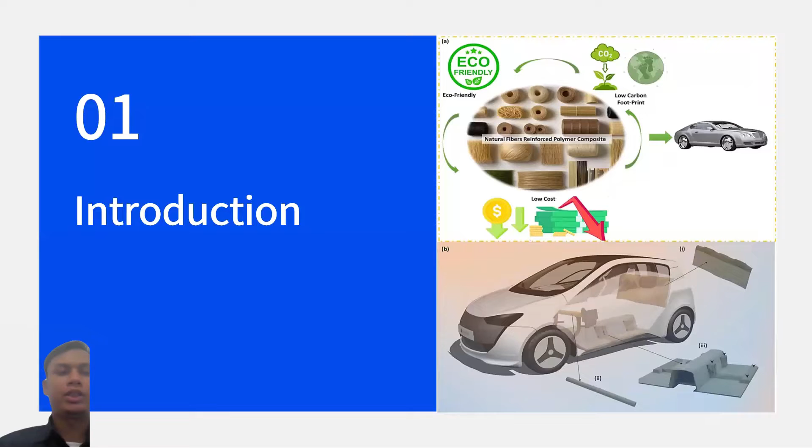The first one is introduction. First, importance of coir and jute fibers. In recent years, natural fibers such as coir and jute have gained great attention because they are biodegradable, low cost, and environmentally friendly. They help reduce environmental impact and promote sustainable resource utilization, especially in the automotive industry where lightweight and green materials are essential.

Secondly, thermal insulation significance. Thermal insulation is crucial in controlling heat gain and loss inside vehicles. Natural fiber with good thermal properties can enhance passenger comfort and reduce energy consumption.

Physical and economic advantage. Coir and jute fibers possess advantageous traits such as biodegradability, low density, good physical and thermal characteristics, affordability and processability, making them appealing for cost-effective and eco-friendly composite material.

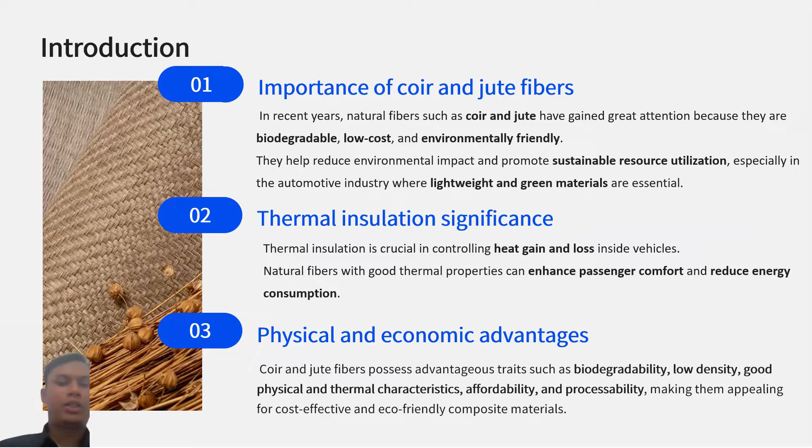The experimental methods. First, we have the extraction of coir fibers from husk of coconut, offering high abrasion resistance due to their lignin content, approximately 45%. Brown coir, thicker and stronger, is extracted from fully ripened coconut for use in matting, brush, and composite production.

In the extraction of jute fibers, they are derived from Corchorus species, characterized by uniform overlapping cells, known for their biodegradability and thermal properties. They are utilized in various composite applications.

The physical and chemical properties. Coir contains cellulose, lignin, pectin, and water, while jute exhibits uniformity in diameter, elongation, and fiber strength. Their distinct properties make them suitable for fabricating hybrid composites.

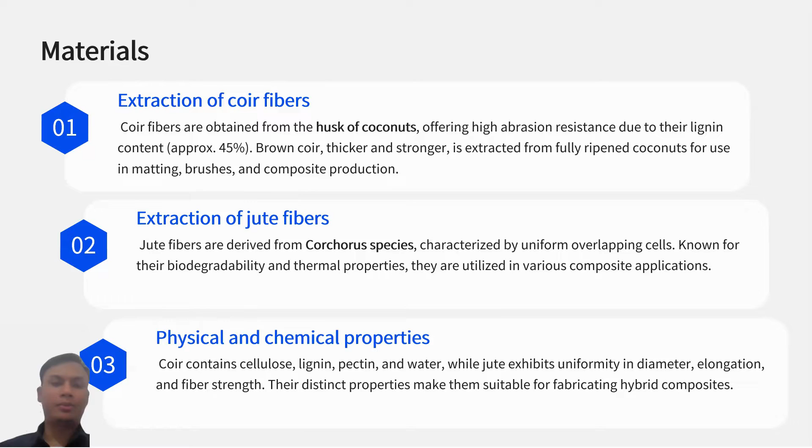The methods for making thermal insulation from jute and coir: we use compression molding, a binder system. A bicomponent polyurethane foam system serves as the binder, ensuring rigid structure and closed pores in the composites. Both polyol and isocyanate components contribute to the durable matrix.

Process detail: pellets of coir and jute fiber blend are compression molded at 185 degrees Celsius for 10 minutes, with pressures ranging from 50 to 150 Pa, ensuring optimal blending and structural integrity.

Blend proportions. Various composite samples are created with fiber blend ratios, including pure coir, pure jute, and mixed coir and jute blends, for example 50-50, 70-30. Thickness and density of samples are tailored for intended performance metrics.

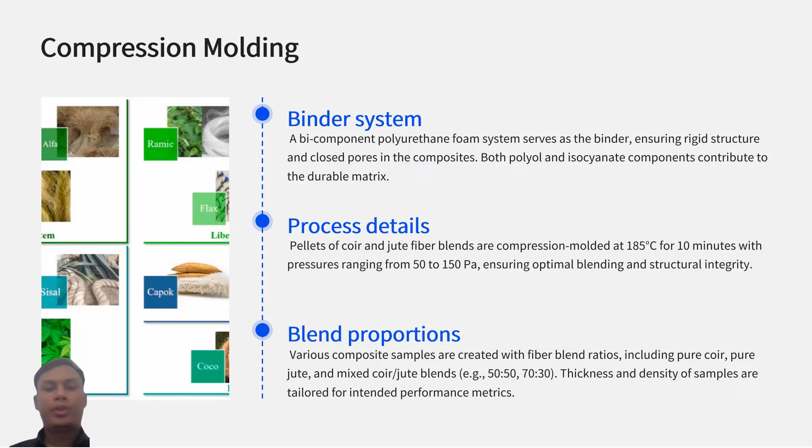After we make composites, we have to test them. The first test is thermal conductivity testing, measured using ASTM C177, which evaluates the composite's ability to resist heat transfer. Samples are tested across a defined temperature range, comparing theoretical and experimental results.

Air permeability, determined by ASTM D737, measures airflow resistance through the porous composite, influencing thermal insulation properties. Resistance increases with fiber density and reduced void space.

Third, we test porosity and density. Porosity, calculated as the ratio of void volume to total material volume, is a key factor in determining thermal insulation. Density impacts fiber packing and insulation efficiency, as defined by ASTM D3776.

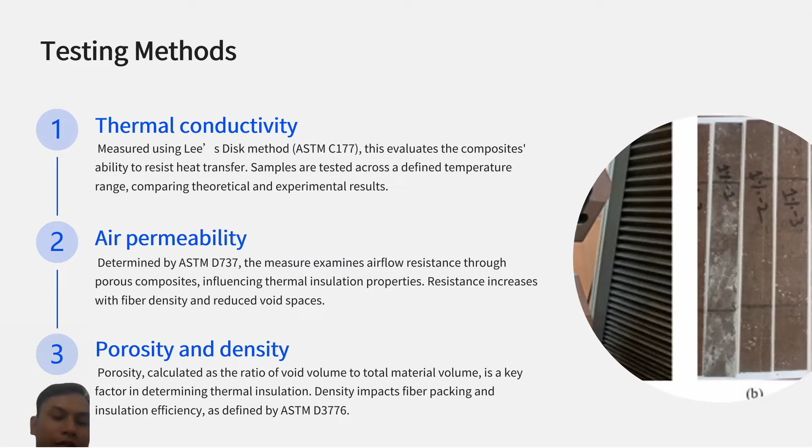Results and discussion. Analysis of thermal insulation property.

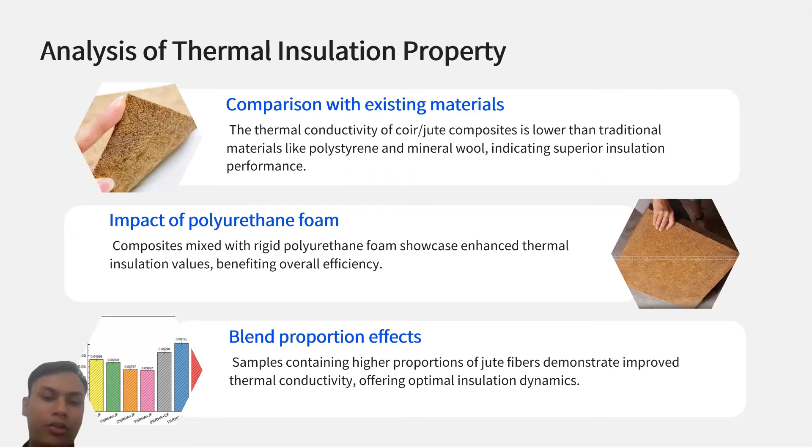Comparison of the composite with existing materials: the thermal conductivity of coir or jute composites is lower than traditional materials like polystyrene and mineral wool, indicating superior insulation performance. Impact of polyurethane foam: composites mixed with rigid polyurethane foam showcase enhanced thermal insulation values, benefiting overall efficiency. Blend proportion effect: samples containing higher proportions of jute fibers demonstrate improved thermal conductivity, offering optimal insulation dynamics.

Next, the analysis of surface morphology. We use SEM analysis, which showed varied adhesion levels with matrix material, where higher fiber content improves bonding.

Fracture surface observation: detached fibers were prominent in samples with lower fiber content, while stronger matrix adhesion was noted in higher fiber weight samples. Pull-out of fibers: visible fiber detachment reflects weaker interfacial bonding in specific blends, impacting insulation integrity.

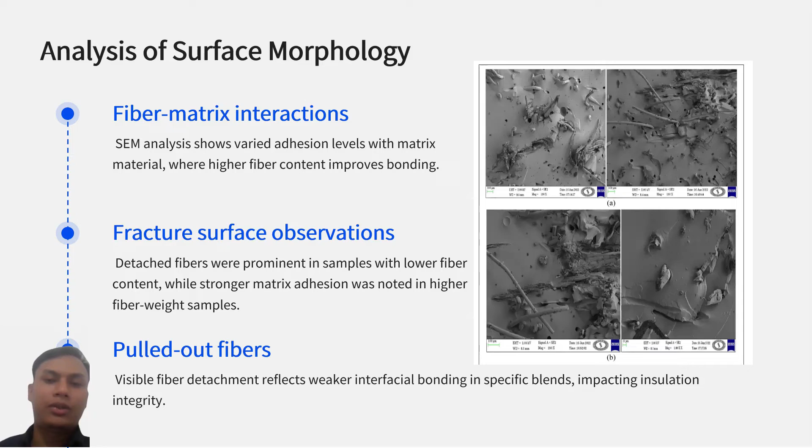Influence of air permeability: resistance to airflow. Higher airflow resistance correlates with enhanced thermal insulation, as observed in denser composites.

The role of fiber diameter: smaller fiber diameter reduces permeability, controlling heat transfer effectively.

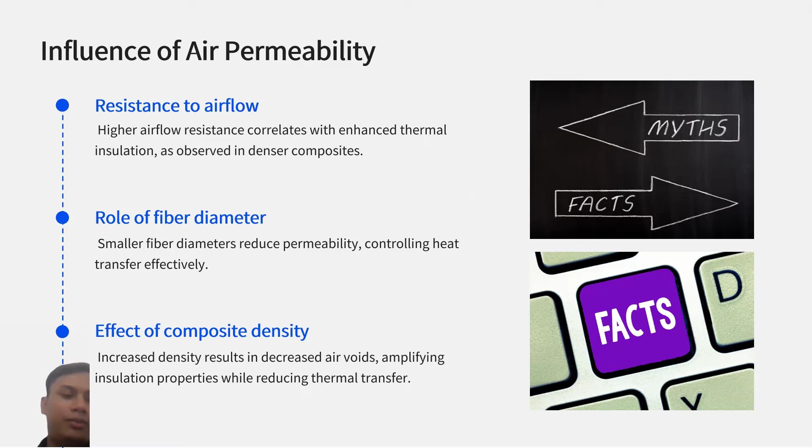Effect of composite density: increased density results in decreased air voids, amplifying the insulation properties and reducing thermal transfer.

Influence of specific porosity: enhancement of heat resistance. Increased porosity boosts heat resistance, optimizing insulation at low and moderate temperatures.

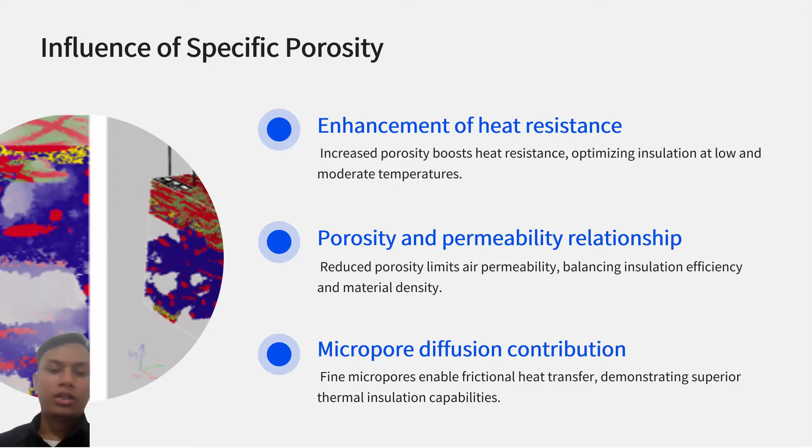Porosity and permeability relationship: reduced porosity limits air permeability, balancing insulation efficiency and material density. Micropore diffusion contribution: fine micropores enable frictional heat transfer, demonstrating superior thermal insulation capability.

Influence of thickness: thickness enhances insulation. Higher material thickness significantly improves insulation at medium and low temperatures. Thermal conduction dynamic: thick absorbent material performs better at lower temperatures but has minimal impact at higher temperature ranges. Optimizing material layers: efficient thermal insulation is achieved with strategically layered thickness in composite design.

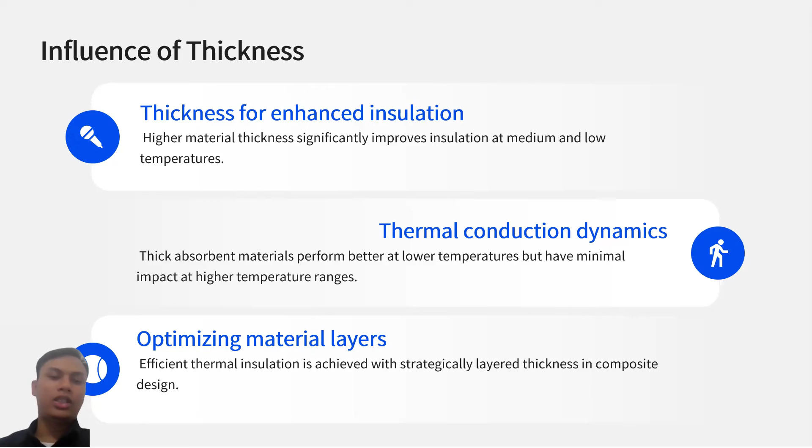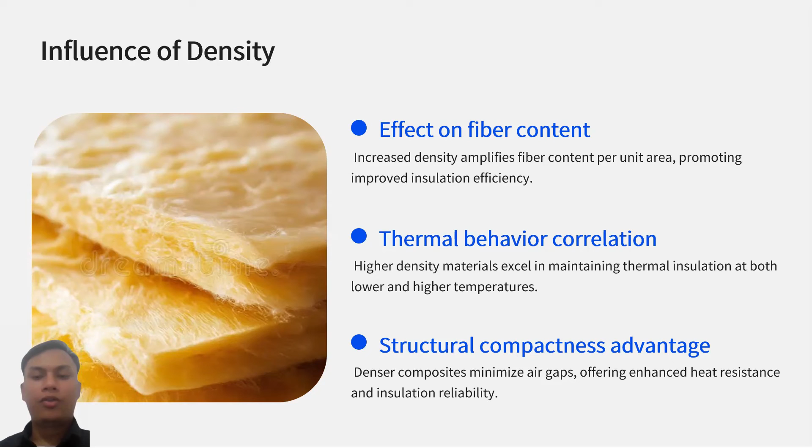Influence of density: effect on fiber content. Increased density amplifies fiber content per unit area, promoting improved insulation efficiency. Thermal behavior correlation: higher density materials excel in maintaining thermal insulation at both lower and higher temperatures. Structural compactness advantage: denser composites minimize air gaps, offering enhanced heat resistance and insulation reliability.

Influence of air gap. Thermal insulation improvement: strategic air gap between composite layers elevates thermal insulation performance, particularly at high temperatures. Optimization of gap size: controlling air gap dimensions ensures balanced airflow resistance and minimizes heat transfer loss.

Impact on heat wave resistance: gaps facilitate barrier creation against thermal waves, yielding higher insulation efficacy.

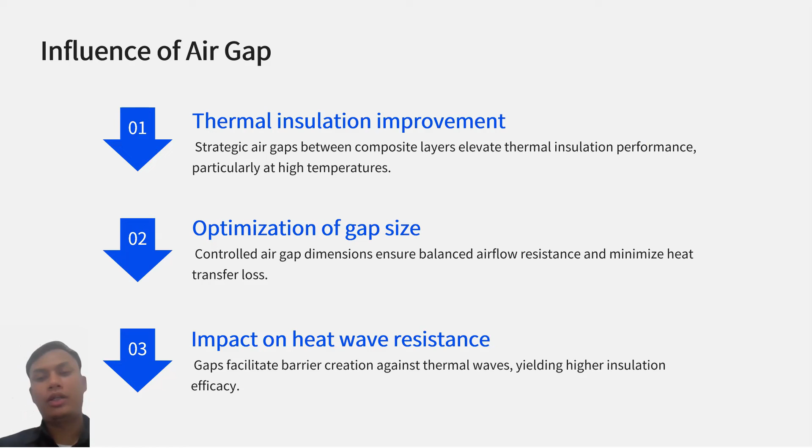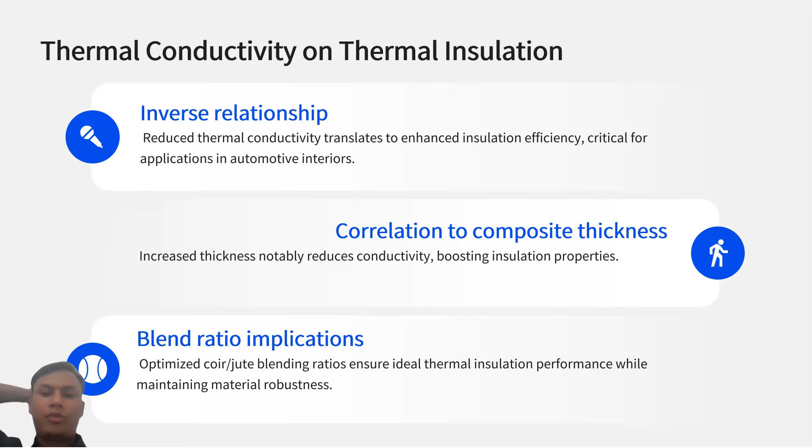Inverse relationship: a correlation to composite thickness. Increased thickness notably reduces conductivity, boosting insulation properties. Blend ratio implication: optimizing the coir-jute blending ratio ensures ideal thermal insulation performance while maintaining material robustness.

The conclusion highlights the lightweight and eco-friendly characteristics of coir jute composites. Coir and jute fibers exhibit notable attributes such as low density, biodegradable nature, and environmental sustainability, which make them an especially suitable choice for thermal insulation in automotive applications.

Discussing high thermal insulation potential: the hybrid composite materials, due to their blended structure and physical properties, demonstrate excellent thermal insulation capabilities, making them effective for mitigating heat transfer in automotive interiors.

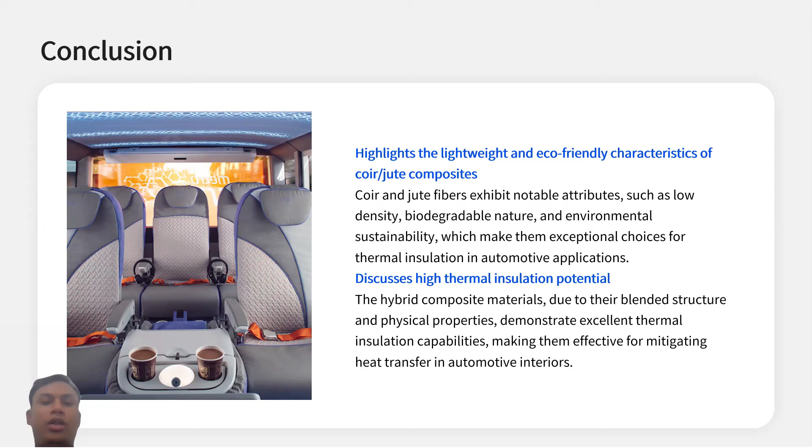Describing broader applicability in technical textiles: coir and jute hybrid composites are effective not only in automotive interiors but also in broader technical textile applications such as insulation in buildings, aircraft, and industrial settings.

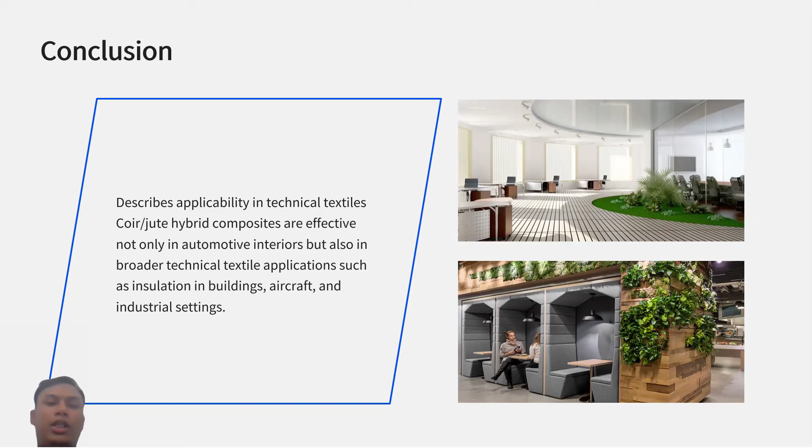Addressing cost effectiveness and environmental impact: natural fiber composites are cost efficient to produce, and their reduced reliance on synthetic material contributes to a lower environmental footprint compared to conventional insulation materials.

In summary, research implications: the experimental results underline the importance of coir jute composites in promoting green material for practical use, combining sustainability with enhanced performance in thermal resistant properties.